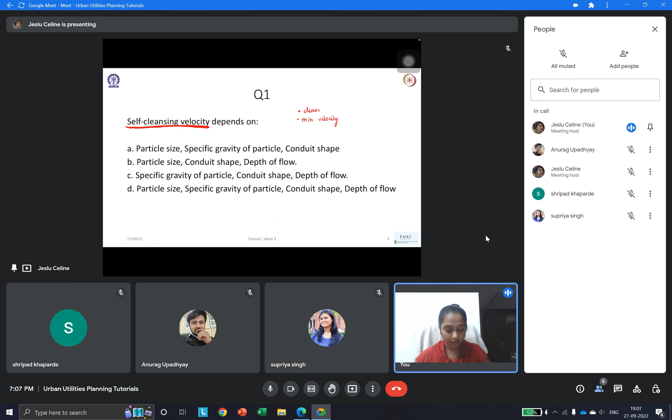So yes, there are certain factors which influence it. Anurag has said it is option D. Let's look at what we learned. Yes, so in self-cleansing velocity, it basically depends upon the particle size and specific gravity.

This is understandable, like whatever material is going, if the particle size is larger, then we would need a greater self-cleansing velocity so that we can carry this material also forward. And specific gravity also, like for water it has a specific gravity of 1, grit has 2.4, so if it's sand or any other material, we need to consider that also. And obviously conduit shape and depth of flow also, because based on the shape of the conduit, the flow depends, velocity depends, simply, and depth of flow.

So this was a very simple question. Anurag answered it rightly also. So let's proceed on to the next question.

So two questions are combined together, with one data given for both. The data says the sewer is laid at a 1 in 600 slope and the diameter of the sewer is 150 centimeters. Assume n to be 0.015 in Manning's formula, and the sewer is running half full. Question 2 asks us to find the velocity of the flow in the sewer.

There are no options to this. We need to enter the right answer.

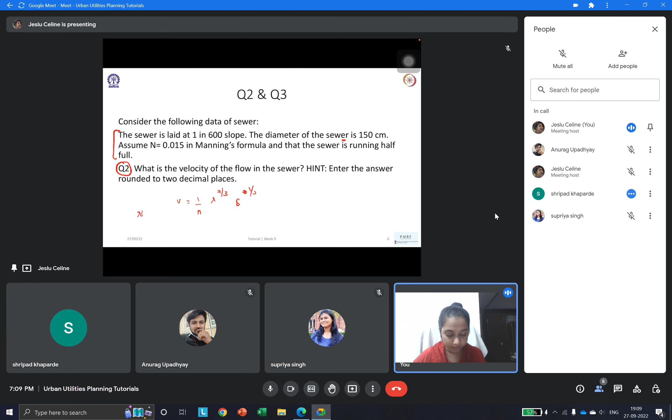So in this, you're saying you don't have to make any changes because it is running half? So if it is running half, what is R?

Let's discuss what R is. Is R the radius, madam? R is not just the radius, it is the hydraulic radius, or hydraulic mean depth - both terms are used.

So that is not equal to the actual radius of the pipe, right? It basically is area divided by wetted perimeter. Yes, this is how we are getting this.

So in this particular case, the pipe is running only half full, which means our wetted perimeter will not be the actual perimeter, but it will be half. So R will change compared to a fully running pipe versus a half running pipe.

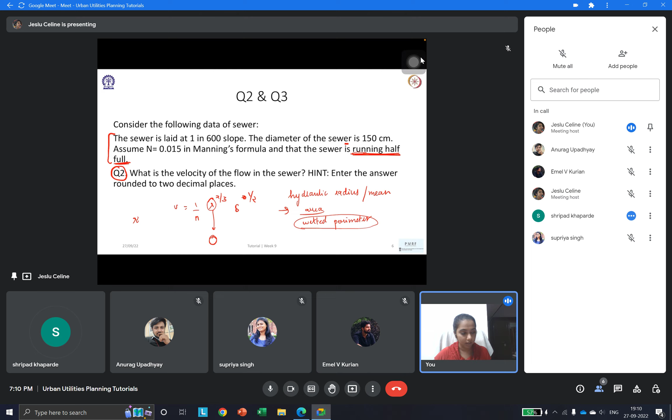I wouldn't say it's exactly R, but let's see what that comes to - we'll discuss that further. So as we said, R is equal to wetted area by wetted perimeter. I'm just writing it as A by P.

So A is pi d squared by 4, and P will be, instead of pi d, now it will be pi d by 2, right? Yes, correct. So we can simplify this, and it will eventually be d by 2. When we cancel out pi, one d will go, this will be 2, so it is d by 2, right?

So if it was running full, then R is d by 4, but now that it is running half full, it is d by 2. So that is the major change which is happening over here in this formula.

And to summarize, this is the Manning's formula that we are using over here. We have learned about certain other formulas also in the previous lectures. Can somebody discuss and give the names for those?

So we have learned certain other formulas - I'm not giving it away, I think you can go back and see, because that will be important later. But the reason why we use Manning's formula here is that the pipe is half full, or not running fully full. The other formulas mainly consider the pipe to be fully full, like a full flowing pipe.

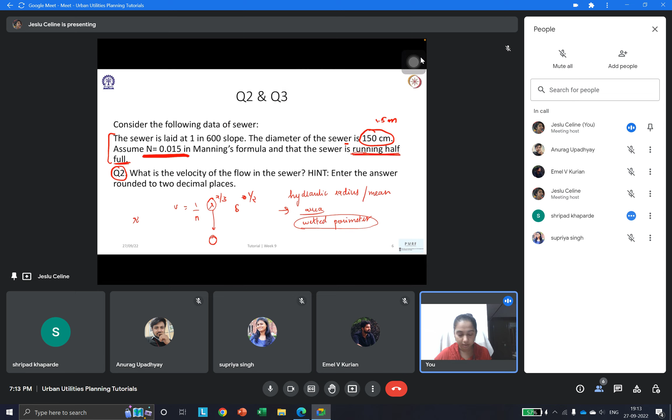Now let's also look at N. From Manning's formula, N is given as the coefficient we're taking, so let's put everything in place: 0.015. And S stands for the slope or gradient, which is 1 by 600. So we get 1 by 0.015, times 0.75 raised to 2 by 3, times 1 by 600 raised to 1 by 2. Can we quickly solve this?

It's coming to 0.51. Hmm, 0.51, no, that's not the correct answer. Let's try again.

Okay, so it says 2.25... 2.24. Yeah, correct, 2.24. Yeah, so 2.2466 is the answer we will be getting. Now we can round it off and write it as 2.25. That's also correct, though we don't have that exact option.

So they have asked us to round off the answer to the nearest two decimal places, so 2.25 is the answer for this particular one.

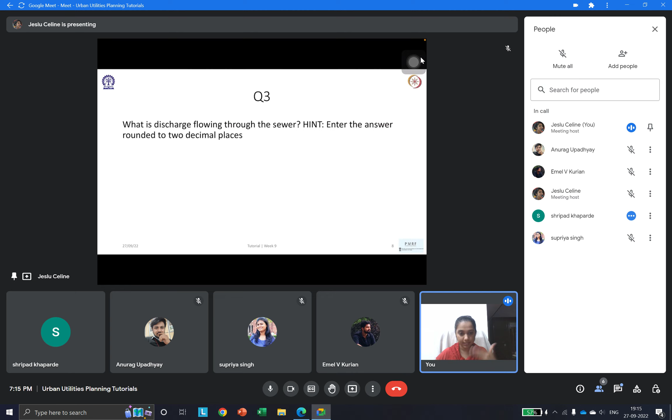Let's proceed. The second part of this question asks what is the discharge flowing through the sewer. Now that we've found the velocity, we know that we can easily find the total volume. Discharge flowing means they're asking what is the volume which is flowing, so how do we go about this?

V is equal to Q by A, so Q will be equal to V into A. But there's a change over here, can we directly apply this formula?

Area will change, madam, because it's half running. Exactly, area will change. So it will be totally half of V into A, that will be the formula here because the pipe is only half full. Now we can easily solve this by taking 1 by 2 outside, with area as pi D squared by 4, into V.

So this is 1 by 2 into pi D... D is 1.5, not 0.75. Sorry, yes, D is 1.5. The whole square, into 2.25, taking the rounded off value itself. Let's solve this now.

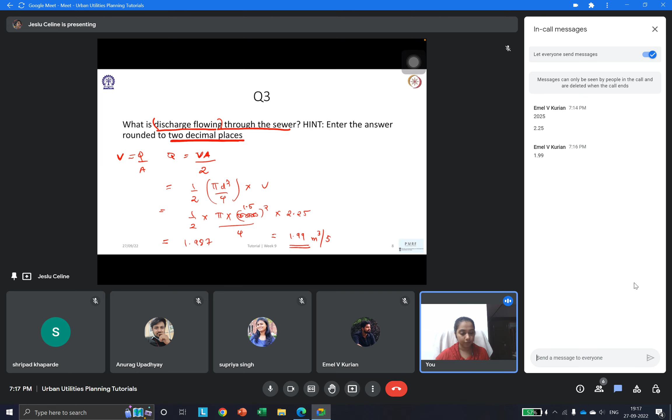Yes, so this is also a numerical, very similar to what we just did. Consider the following data: circular sewer of diameter 50 centimeters, slope 1 is to 220, and n is given the same, 0.015. Question asks what will be the velocity and discharge of flow in meter per second and meter cube per second respectively. Let's go with the same method we did before.

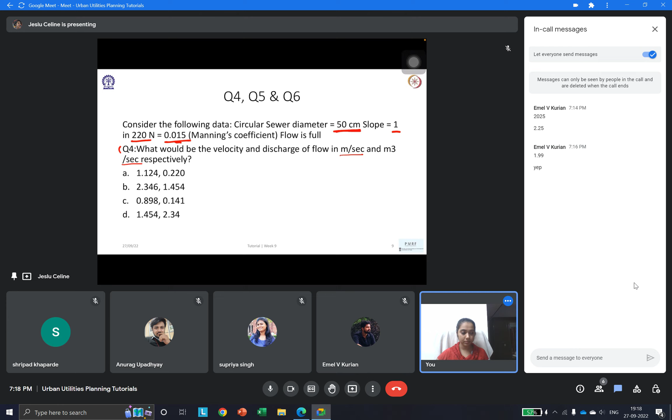You can do it independently and attempt it yourself. I'm just writing down the steps, so in case you have any doubt, you can look on. I would suggest you to try it independently.

Just a confirmation, R here, I'm used to writing M for it, sorry. So R here is D by 4, because in this first part the pipe is flowing full, that's the only change happening over here.

Okay, let's just see. So our calculation comes up to this, right? Yeah, so I don't know where it's going wrong.

So this one will be 0.25, and this one will be 0.0674. So when we multiply everything, can you just check that once more? Yes, yes, Emel's put the answer. It is 1.12336 is what we will be getting.

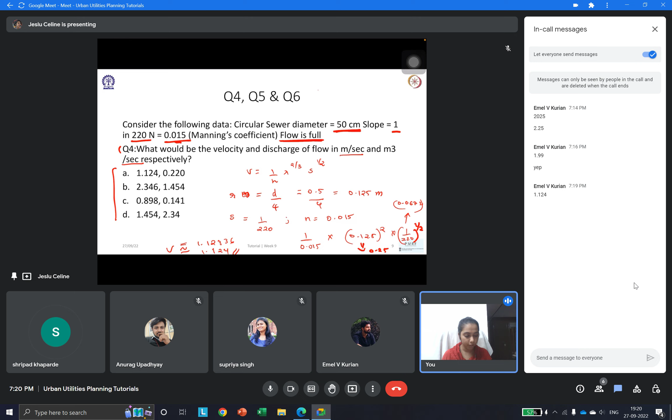Okay, shall I proceed to the next part? But my answer is coming 1.4 only, madam. Maybe, 1 point, no, but if you do this calculation, that is 0.25 into 0.0674 divided by 0.015, it will come up to okay, 1.1233, something, right?

Okay, you can do that, no problem. You can use r to the power 2 by 3. Yes, r is to the power 2 by 3. And Emel, please put this in the chat box. Yes, did I write it wrong? Yeah, it is 2 by 3. Oh okay, here, yeah, it is 2 by 3.

Okay, so this question is not over here. We just found the velocity of flow. Now we need to find what is the volumetric flow also, the same way we did the previous one. Let's go, Q is equal to AV.

Now here it is easy. Pi d square by 4 into V, which is equal to pi into, now this, I'm just doing.

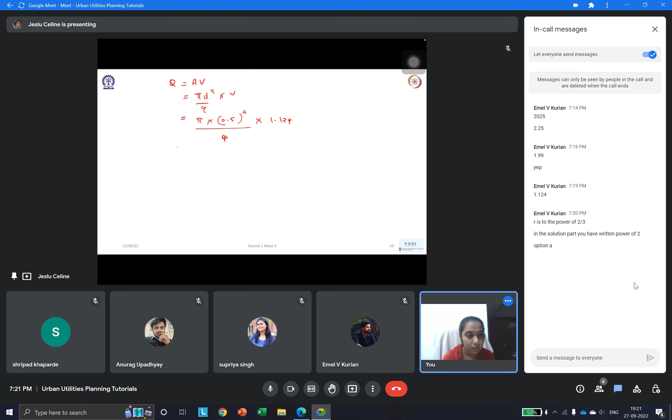In the solution part, yes, I understood. Thanks, Emel. Yeah.

So I'm waiting for the final answer over here. Okay, Emel says it's 0.221. Yeah, so we can take it as 0.22 meter cube per second. Right, so yes, coming back, it is there in option A.

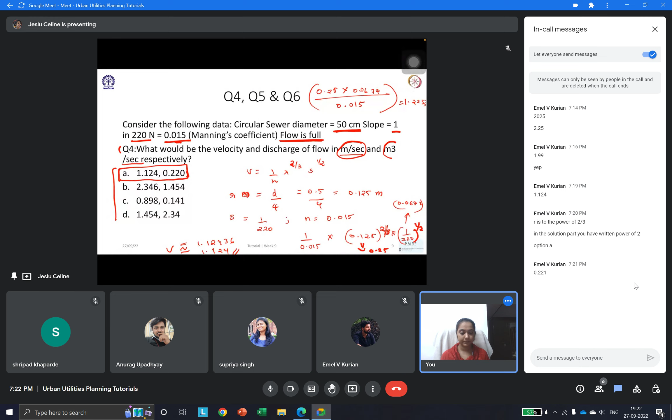Okay, I'll wait for 2 minutes. Any doubts in this question? And also, Shripad, if you've not got the answer rightly, we can discuss over it. Let's see what is going off.

Let us continue, madam, because whatever velocity I have calculated from 1.4, so that will be different. Okay, fine. Yeah.

Okay, so you can check this, and in case something feels off, you can put it in the discussion forum also later if you're facing any difficulties. Then we can take that up later, or by the end of the class if you are able to do it. Yeah, we can. But it's the same method, so there is nothing. Yes, yes.

Okay, so if that's the case, proceeding further to the next question. Question 5: what would be the velocity and discharge when the same is flowing at 0.3 of its full depth? So how will we do this question? How do we approach this?

Actually, one table is there from where we can get the values of, for 0.3 full depth. Yes, exactly, and similar process can be followed. So the crude method would be to recalculate the whole thing by calculating what is the hydraulic radius, the hydraulic mean, based on this when it's only 0.3 depth. But that is very time consuming. So once we have the data for the full flowing pipe, how it would be, we can obviously use the already existing proportionality relationships and find it.

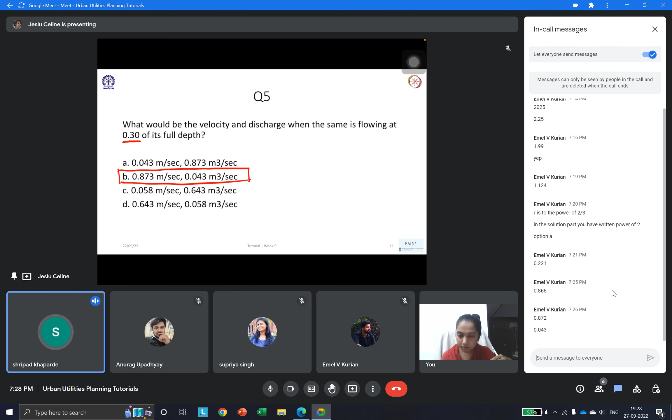Can I proceed further, or do you want me to halt for 2 minutes so you can catch up? Shripad sir, can I proceed further? Yes, it is okay. Yeah, fine, I'm proceeding further.

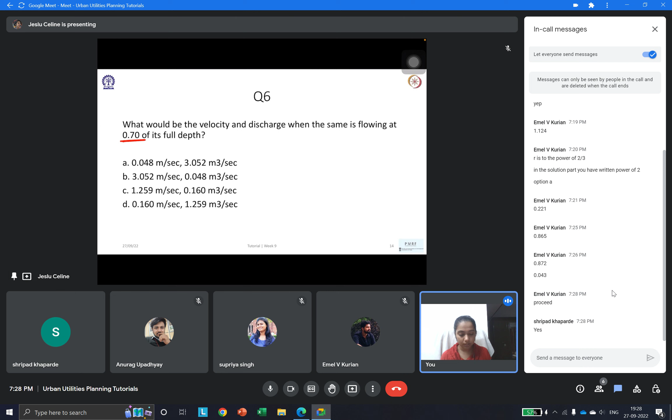So the next portion is very similar to the previous one. Now this one is asking what it would be when the pipe is flowing at 0.7 of its full depth. Let's do it the same way we did the previous one.

So this one I am not going to do. I would request you to try it and then just give me the final answer. So the two values would be V by V would be 1.120 and Q by Q would be 0.7258.

Okay, Emel's got the answer, fine, very good. Emel says the next one is, yeah, correct. I'm just waiting for 1 more minute so I can get the answers from others also.

Correct, Anurag has also got it.

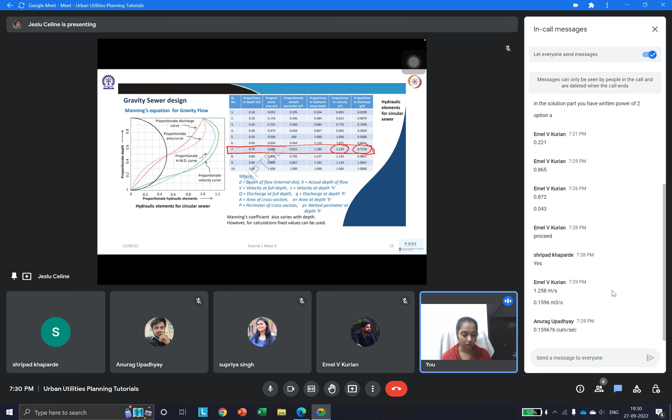Right, so shall I proceed further? Yeah, okay, I'm proceeding further.

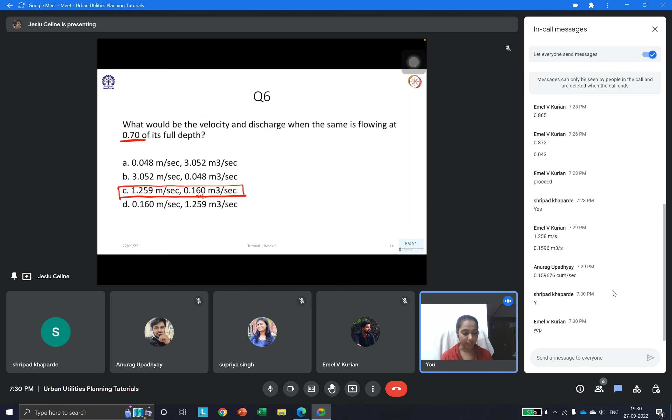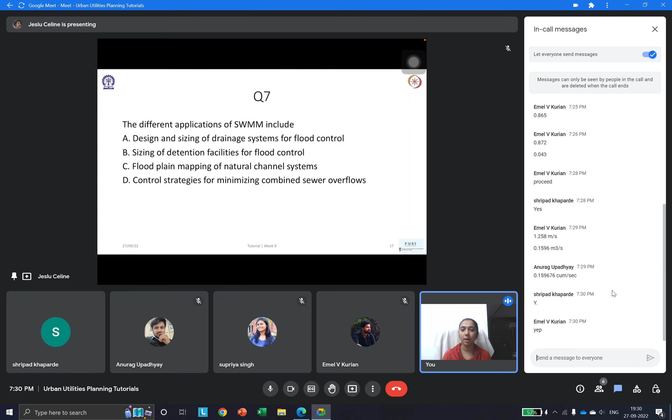So we are in question 7 right now. Question 7 is about the different applications of SWMM include... So firstly, what is SWMM?

Supriya, what is SWMM? Do you want to take this question up? Yeah, I forgot about this. I attended the lecture, but not able to recall it.

Okay, Emel has typed storm water management. So Emel, do you want to take this question up? Not much. Okay, you can guess. It's okay.

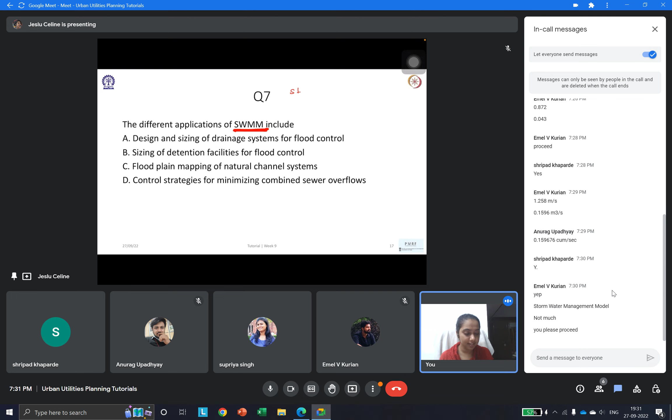Okay, fine, so Emel is right that it is stormwater management model, so this is SWMM. It's the software we use to find stormwater solutions. So why do we use software again? Because the whole process is very complex — to manually sit and calculate for every node, the network, the sewage and stormwater network can get very complex when designing for a large city area, or in fact any area. So we use software for that. Yes, multiple answers can be correct for this.

Okay, so option A is asking about the design and sizing of drainage systems for flood control, the sizing of detention facilities for flood control, floodplain mapping of natural channel systems, and control strategies for minimizing combined sewer overflows. So let's go through everything. First one, is it important?

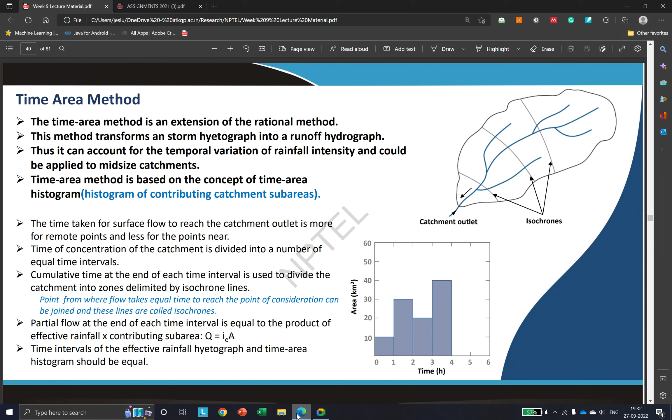Supriya, do you want to take this? You were answering this, right? No, but I can now.

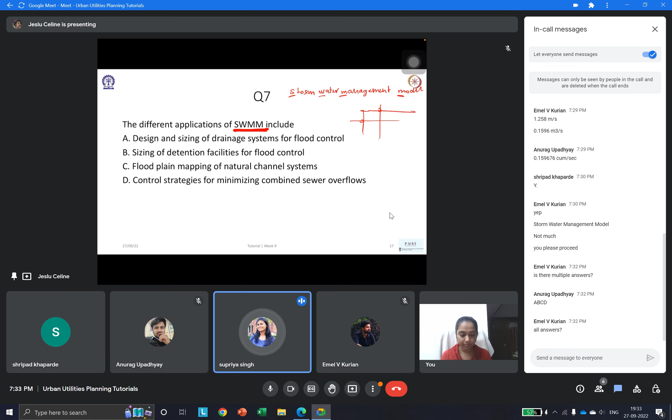Okay, fine. Design and sizing of drainage systems can be modeled for stormwater drainage design, and size of detention facilities - not sure about this. Floodplain mapping of natural systems, yes. Control strategies for minimizing, yes. So you're saying basically A, C, and D?

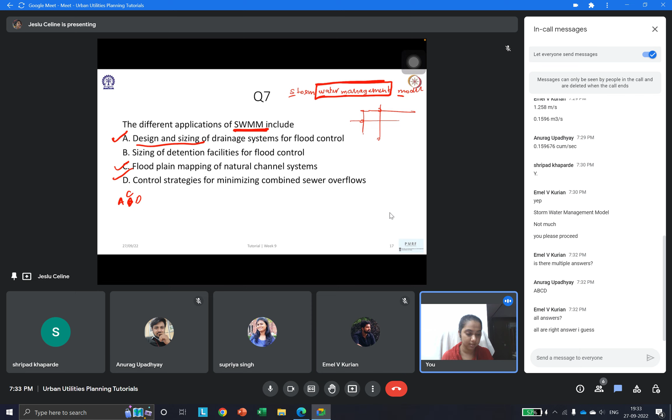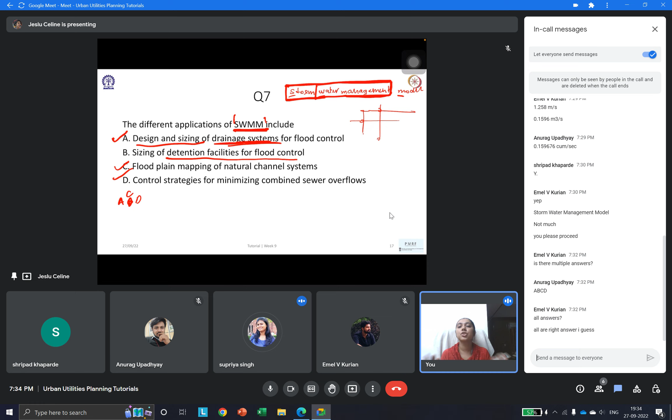Okay, why not? Design and sizing of drainage systems is important because what we're doing with the software is basically stormwater management - there's nothing more. It's just that it is a software application, like we are using a software to do that. So obviously, to design our drainage systems it is important, and sizing of detention facilities for flood control is also important, and SWMM allows that also. We can design or see what are the different detention facilities and how do we size it, and based on that, how is our management model changing, how much pipeline is required - all that we can calculate in this. And yes, floodplain mapping also we can do, and control strategies for minimizing combined sewer overflows, that also we can do. So let's just see.

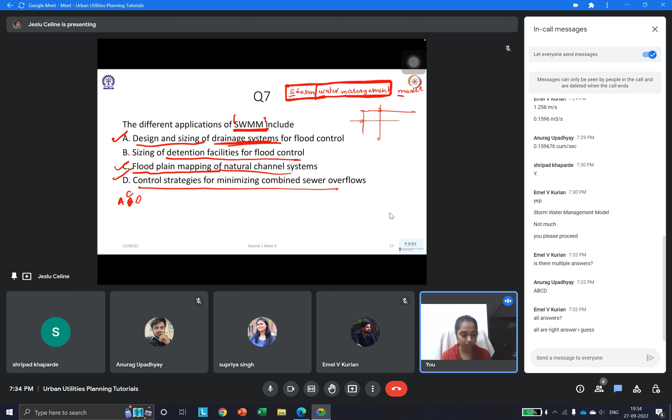This is what we learned about the SWMM model - design and sizing of drainage, sizing of detention facilities, floodplain mapping, control strategies. So all of this is included. Right, so all the answers are correct. Yes, Emel, you're right, all the answers are correct. You should have attempted it. Right, so let's proceed further.

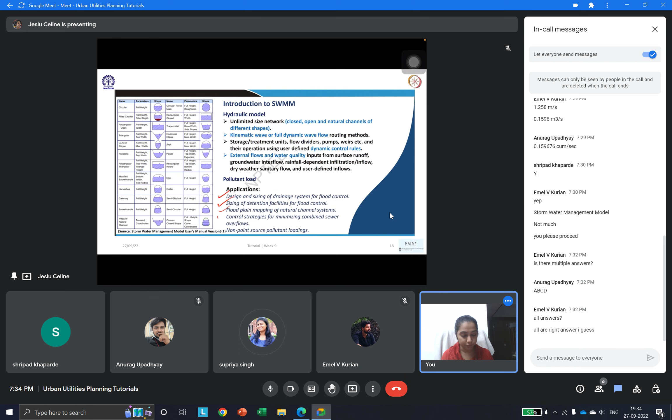Let's go by the options and let's see what the other options mean - like what is design period? Design period is based on the life of the system, for how long, how much. Yes, life of the system, madam. Yeah, life, you can call it that - basically the life of any system also. So here we are mainly talking about service or utility - the life of the utility that we are providing, or the whole service that we are designing for. How many years will it last? Usually it's taken to be about 30 years for the entire capacity that we are building it for.

What is hyetograph and time-area histogram? No idea? Okay, this is there in the lecture. A hyetograph is basically a graph which shows the distribution of rainfall. In one word, we can say it's a distribution of rainfall, and on the x-axis we have the duration of rainfall - time, usually given in minutes - and on the y-axis we have the precipitation, that is how much rainfall is coming over time.

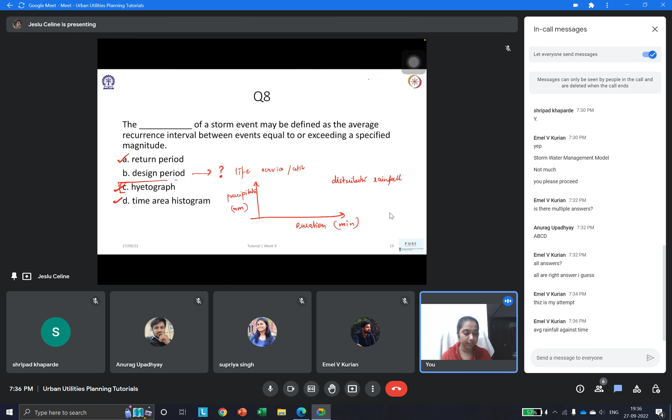So why this is important is because we have learned that in a catchment - we were discussing this in the previous class also - about time of concentration. From different regions, if you're taking a point, the area of concentration or the region where we want to find how much rainfall is coming, it can be the catchment inlet or any point. Sorry, went to a different slide. So time of concentration is important - from different regions, at different times, it will take different time for water to reach that particular point. That is why we are plotting this.

That is, at a point, for different durations - from 0 minutes to 10 minutes to 20 minutes - how much water is coming to that particular point. So it's a histogram because it will keep varying. Firstly, in 10 minutes, water from this location comes in; in 20 minutes, water from this location also adds in. So it can be there. Sometimes, after a certain duration, rainfall also drops, so the intensity of rainfall is also reducing. So overall, after 30 minutes, the water coming into this point can reduce. So it's a basic histogram that we are plotting.

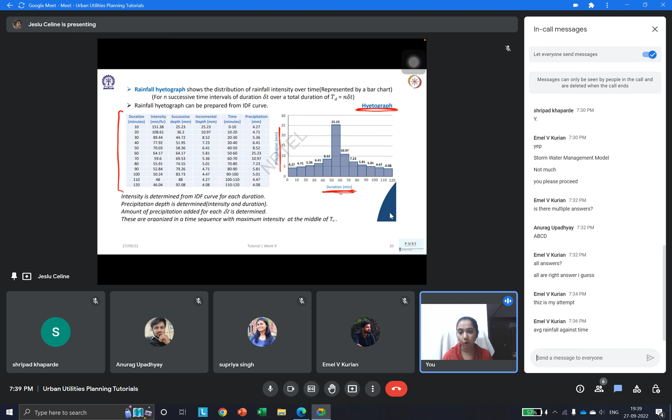I've explained this at a very high level, just a simple initial discussion. For more detailed discussion, I would strongly suggest you see the lecture, because the professor explains it very thoroughly, with all the step-by-step methods. That will give more clarity.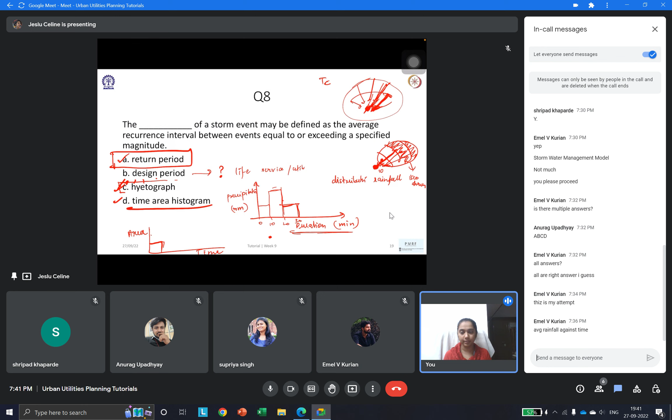So we discussed all this in order to look at what this is, and the answer is correct - it is the return period which we are discussing over here.

Let's go to the next question, again about return period. Return period selection of a storm depends upon which of the following factors - again multiple options are correct. Let's go one by one: drainage area - does it depend on the importance of the drainage area, the return period?

Yes, it depends upon the drainage area. And socio-economic conditions - does it depend? Yeah, this is also right. So that is also right. Again, why socio-economic conditions?

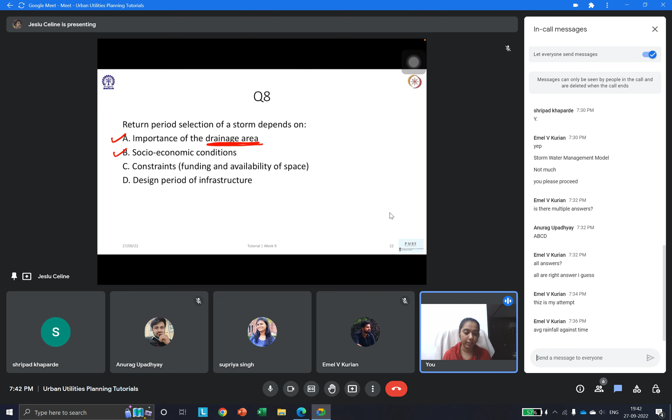Depending on the covering of the area - impervious surfaces from roads, buildings, or other infrastructure facilities - exactly, infrastructures. So it depends, because when you're talking about area, it's just the physical radius or area being considered. But socio-economic conditions define what is actually there - how much water will evaporate, how much will percolate, how much will be surface runoff. All that depends on the overall socio-economic conditions or what exists there. So yes, it depends on the available area and everything - that's why option B is also right.

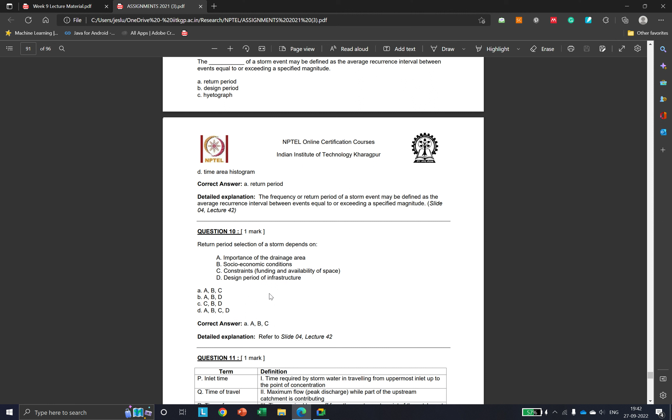Now, constraints - funding and availability of space - will that depend? This is already covered under socio-economic conditions, but yes, it will also depend, like availability of space. So it's interlinked - as a separate option it's not strictly required, but if it's given, then it is also there. Obviously that's also one important factor.

And the last one is design period of infrastructure - will that depend? Yes, that will depend. Yes.

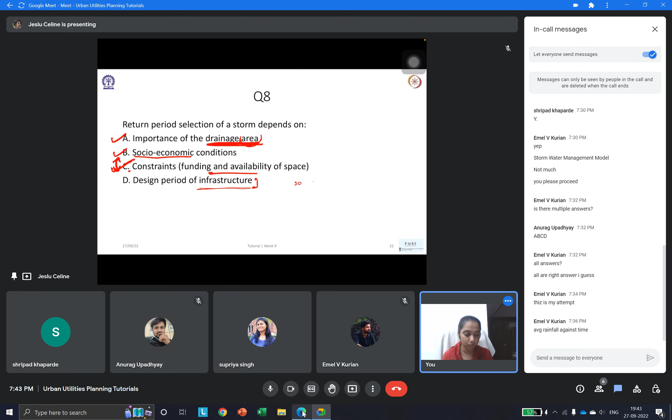There's a small twist here. Design period of infrastructure basically refers to the infrastructure or utility that we are designing - that's what is meant. We said design periods of 30 years or 20 years are usually used in design. But the relationship is the other way around - the design period of the infrastructure is based on the return period, not the reverse. Return period is how much time it will repeat, or the recurrence interval, which doesn't change just because your infrastructure is designed for 30 years or 20 years - your return period won't change much. So that direct relationship does not actually exist.

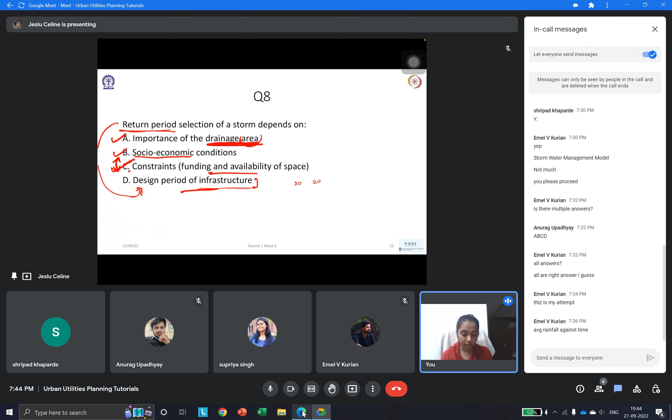So the other infrastructure, socioeconomic conditions or other constraints mainly depend upon the surface level of what is happening there, the system or the overall pattern in which rain falls and evaporation happens. But the overall infrastructure that we are designing for water supply, like our water supply infrastructure or sewerage infrastructure, is what they are mainly talking about here.

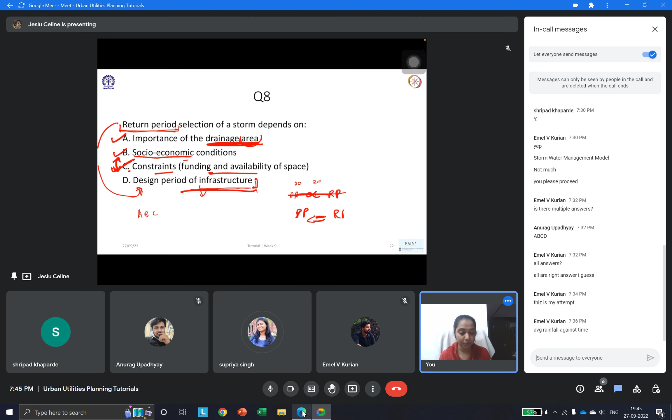So that doesn't affect the return period. Options A, B, and C are right, but the relationship for design period of infrastructure is that design period depends upon the return period. I wouldn't say directly proportional. So design period has a relationship with the return period, but return period is not dependent on the design period. Here we've asked about selection of stormwater return period, which does not depend upon the design period, right?

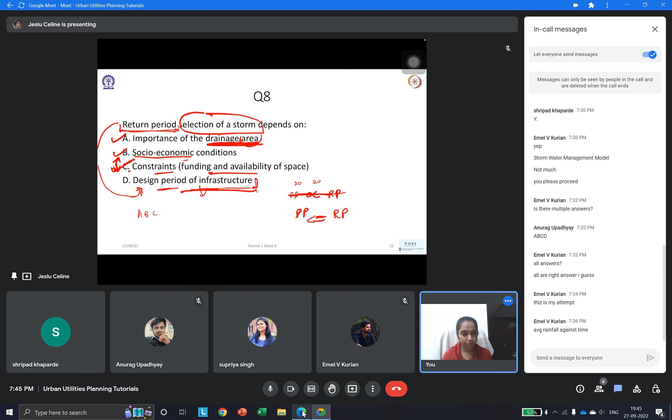So in question 9, it's a match the following. Let's go one by one. What is inlet time? Which of the options will correctly represent inlet time? Is it the time required by stormwater in traveling from the uppermost inlet up to the point of concentration? Is it the maximum flow? No. Is it the maximum flow while part of the upstream catchment is contributing? No. Is it time required by runoff?

Supriya, why don't you answer this question, that'll be much easier. I think the third one is for P, third. P is third: time required by runoff from the most remote point of the catchment to the flow across the ground surface, drains to the inlet of the sewer. Yeah, right, you're right, so this is 3.

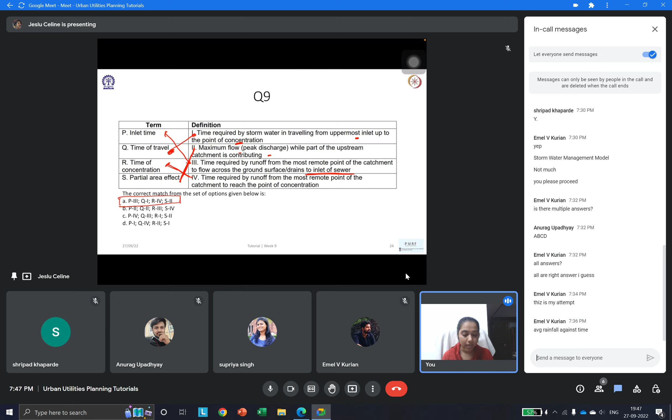So just to explain further, time of travel basically depends upon the uppermost, that means the overall area. Time of travel means from all the regions when it comes, what is the time which is required, from the uppermost or from the farthest point, uppermost inlet up to the point of concentration - that is the point we're considering, that is time of travel. But time of concentration basically says that from the most remote point across the ground surface, time of concentration is the time required by the runoff from the most remote point of the catchment to reach the point of concentration.

Sorry, I explained it wrong, let me correct it. I'm talking about time of concentration, that is this figure, and time of travel is the other figure we've learned. That is, you have an inlet point, so from that initial inlet point, to reach the next point, that is the time required for traveling to the uppermost inlet up to the point of concentration, the region which we are considering - so that is time of travel. Sorry, my bad, I made that mistake while saying it. So this is correct: time of travel is the time required by the storm traveling from the uppermost inlet up to the point of concentration, and time of concentration is this one. We've kind of discussed this in our previous tutorial also.

And partial area effect also, it is that at certain times, the peak flow can occur when the upstream is not even contributing - that can even exist. We discussed this also in the last tutorial, so I'm not going deep into this.

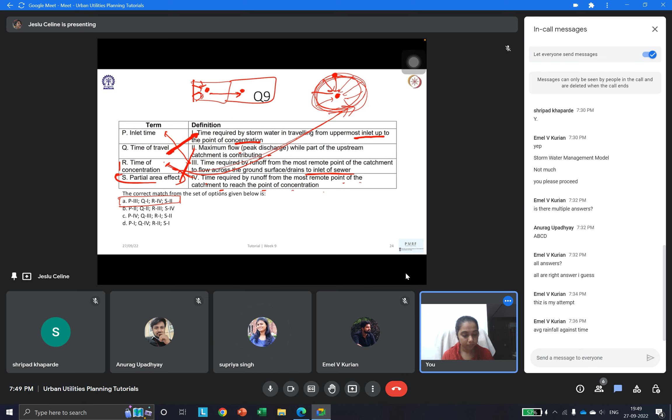So let's proceed further, question 10: the right order of modeling in SWMM is. This is actually directly from the lecture.

Anybody wants to attempt this? The first analysis is done, so I think E would be the first one. But before analyzing, you need to do certain things, right? How can you, the whole software we're using is to analyze and design, right?

Default options and object properties are set. Exactly. First one is we need to set the default options and properties. Then second one: catchment and sewerage network and components are drawn for the study area. Correct. Then after we set the properties, we divide.

That is what is a catchment, then how is the sewerage network going, components, yes. Correct. Then third, accordingly, based on that, we again redefine the properties of object as per existing or proposed design. Correct, exactly. And then what would be the next one?

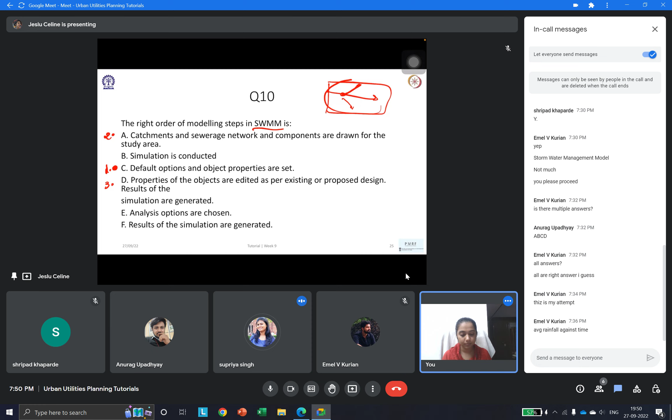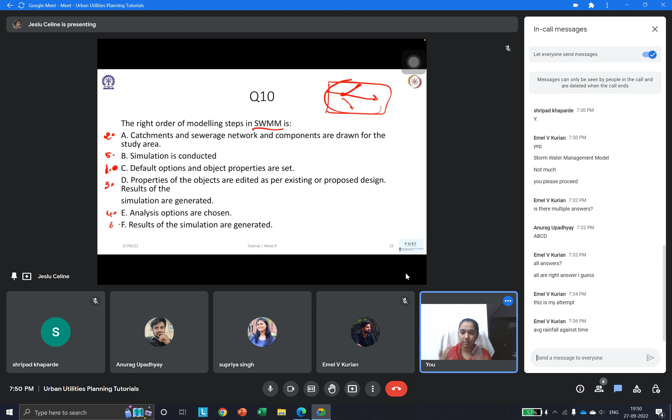Then comes the analysis part. Yeah, then comes our analysis part. And then analysis, then simulations, then results. Simulations and then results. Correct, Anurag. Very good. So this is the exact process that we are following, and this is what we discussed in our lecture also. That is the correct order given in the lectures.

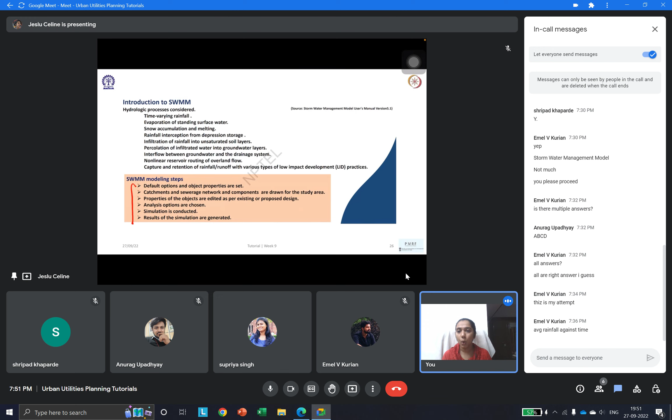Okay, let's go to the next question. Choose the correct statements from the following. The saturation near the point of concentration influences the runoff more than areas farther away. Longer periods of light rain correspond to lower runoff coefficient, and rational formula is the most popular method to determine stormwater runoff. Choose which of the options are correct.

Any guesses? B is correct. Let me see, A, C, okay, A, B and C is correct. Longer periods of light rain correspond to lower runoff coefficient. Why does this happen? Because if the rainfall is for a longer time, the intensity of rainfall is low, and percolation or infiltration will be more.

One second, excuse me. Okay. Let Supriya come back, we'll have a discussion on this once more. Yeah, C is correct, she's correct. So she says C, C, C, C is correct. Okay, C is correct.

Rational formula is the most popular method to determine stormwater runoff, yes, that we have discussed. C is correct. What about A, Anurag? Saturation near point, yeah.

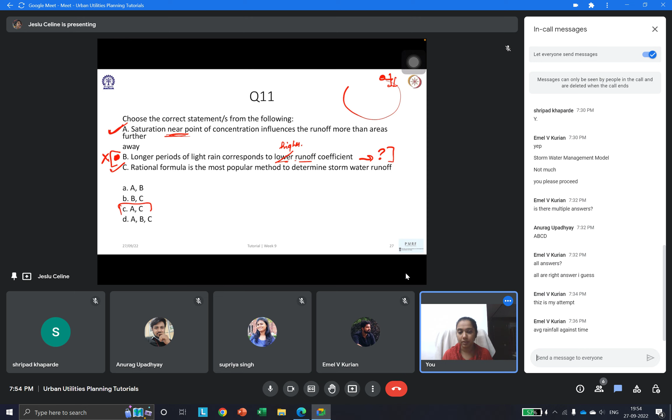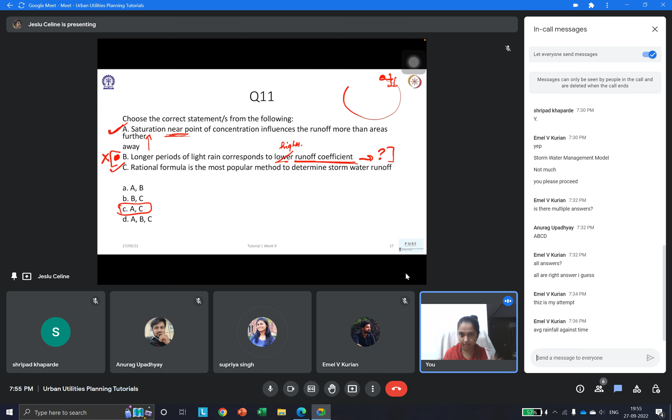So from that point, there's more water which is running off, so our runoff coefficient actually increases. So option B is the wrong answer here, our answer is A and C. Has Supriya come back? Okay, yes, I am back, and now I understood, because it is actually asking about the coefficient, I didn't read the lines properly. We were talking correctly about it, it is a runoff coefficient which they have asked, so it will be higher and not lower. So the same reason why option A is correct also, it's the same reason which was already explained.

Yeah, in the lecture also, this is, sorry.

Yeah, in the lecture also this is what we discussed. So this is option B: longer periods of light rain saturate the soil, giving a higher runoff coefficient. And the other point: saturation near the point of concentration influences runoff more than areas farther away. So these were the two options we had.

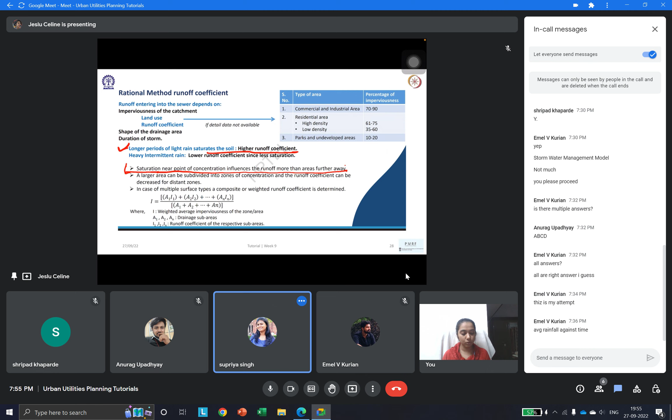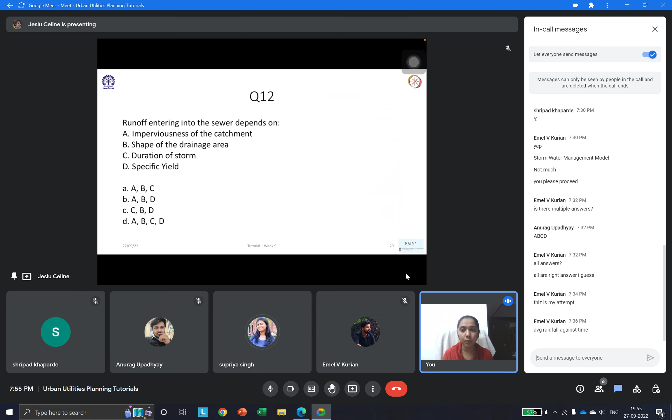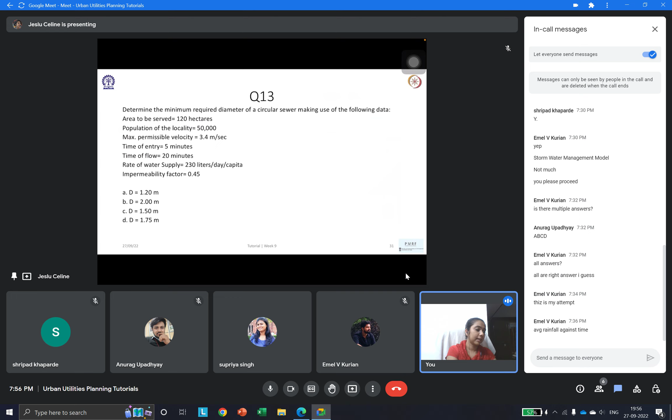We have almost only 5 minutes left, so I'll quickly jump to one more numerical that was there. I think theory questions can be easily solved, so let's jump on to that. The other theory questions are actually very easy, so they can be solved.

Determine the minimum required diameter of a circular sewer making use of the following data. We have the area, population, and maximum permissible velocity given. So we are basically asked for the diameter of a circular sewer. Mainly we have been asked to design a combined sewer - I'm sorry, the wording might be missing over here.

So we are asked to design the combined sewer. So for combined sewer design, how do we go about it? What are the components that we need to consider for combined sewer design?

Yes, Supriya. Yes, I didn't listen, can you please repeat? I was asking what are the components that we need to consider in a combined sewer, like what will be there in a combined sewer?

Combined sewer will have stormwater and sewerage both. So we'll have to see what is the quantity of both stormwater and sewerage. Usually first we take sewerage and then we calculate stormwater, add it up, and get the overall quantity. Based on that quantity we go for the area or the diameter of the pipe required.

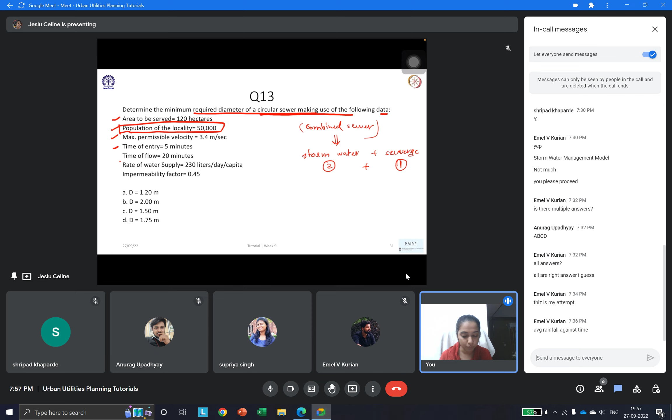So let's get started. First, in order to find the sewerage which will be generated, from the data we know what is the quantity of water being supplied. What all information do we have? We have the population and the rate of water supply in liters per capita per day. So the overall quantity of water will be population into the rate of supply.

I'm just writing it as rate of supply. That is 50,000 into 230. But this rate is liters per capita per day, so this per day we are converting into seconds also, because this is what we did in our water supply calculations - it's the same continuation. So this divided by 24 into 60 into 60 gives us liters per second. So what does that work out to?

It is 133.1019, so I'm rounding it off to 133.1 liters per second. Cool, so this is for the average.

Now for maximum or peak discharge, we have learned that we assume it as 1.5 times the actual. So maximum discharge is 1.5 into 133.1 liters per second, which works out to 199.65 liters per second.

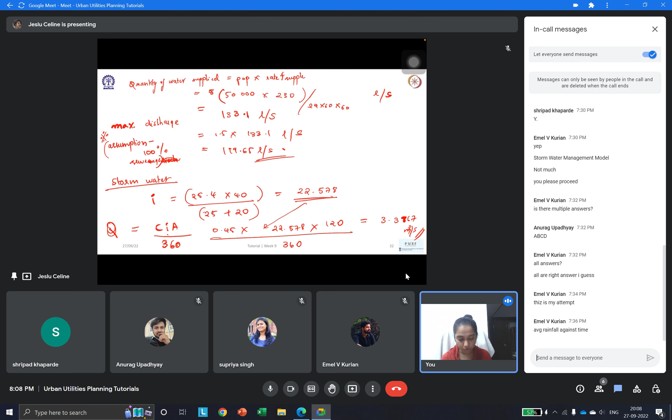So we've been asked to find the diameter, right? So usually, 1.15 we can round it off, and then 1.2. So 1.2 would be the diameter that we would be choosing. Let's see, options also we have 1.2 over here. So option A, D is equal to 1.2.

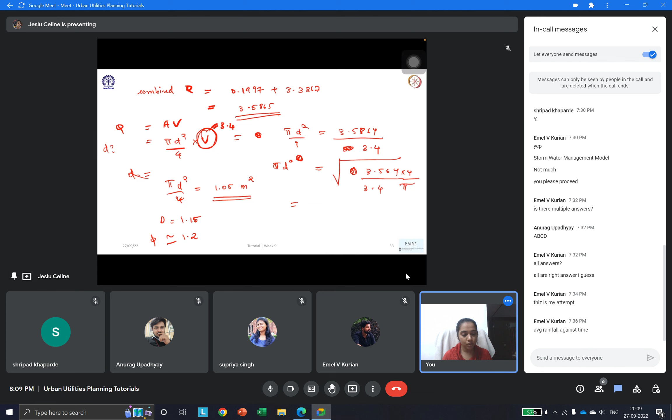So I don't think I have any other numericals. These were the 16 questions which are there. The other questions are not very difficult. For instance, question number 16 is just a direct definition from the presentation only, so I don't think I need to go through them. The one regarding effective range is also a very easy question, just a direct definition of the time area method, question number 15 also. So I'm not going into them because we have run out of time. If you have any doubt, you can ask, or if you want me to go through the questions, I can go through.

Madam, one inquiry. For the initial first 4 assignments, I missed them because of late enrollment or something, so right now I can solve only 8 assignments. Okay, so that is okay.

Actually, I'm not the person to answer that. NPTEL team should be able to answer that. So maybe you can put it in the discussion forum. Somebody from the main team, who manages the marking and assignments and all that, they will come and answer. So I don't know about this.

Okay, because they have mentioned that best of the 8 assignments they are considering. So if we are attempting 12 assignments, only 8 will be considered. Is it so? Okay, it's best of 8, fine. Yeah, only out of 12, only 8 assignments will be considered. This is, I'm sure, because for the transportation planning part, I missed one of the assignments, so I had a query for this. Then they replied that out of 12, only 8 will be considered. So no problem.

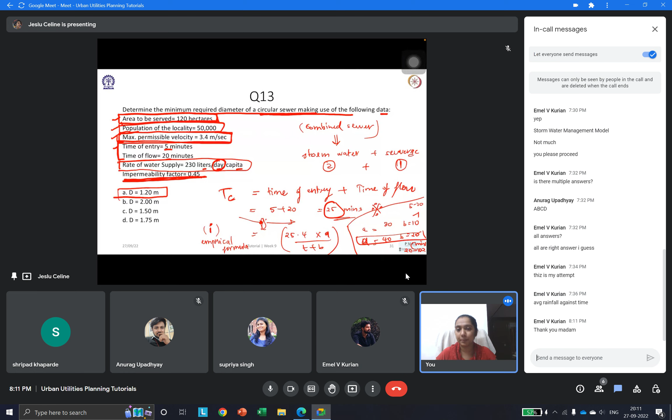Okay, that's good, I was not aware of this. Thanks, but the first 4 are easy, now it is more calculation. Yes, but I can also tell you that assignment 11 and 12 are comparatively easy. Fine, okay, no problem, it's good now. Actually, it's not just that, for the final exam also these questions will come, so it's good if you're solving these questions in these assignments.

I believe that three of you have registered for the exam, right? Yes, yes, I have registered. Yes, so it will be useful, especially the calculation part, it'll be very useful.

Okay, thank you. I have one thing for the transportation planning part, if you could convey - actually 3 numericals I'm not able to solve for this week's assessment. I'm putting it in the query forum, but I got the reply and I couldn't understand the reply also. Then I replied back asking for some similar type of solution so it would be easy for me to understand. But tomorrow is the last date, so if you can help me with this, if someone from the team, yes. I'll talk to Niyata, Niyata is doing this one, right, or the live sessions for you. Yeah, I think her.

Yeah, it is Niyata, so I will talk to her. Tomorrow is your submission, right? Okay, I'll let her know. If by tomorrow morning or afternoon maximum she can get me some similar type of solution, it would help me solve the assignment questions.